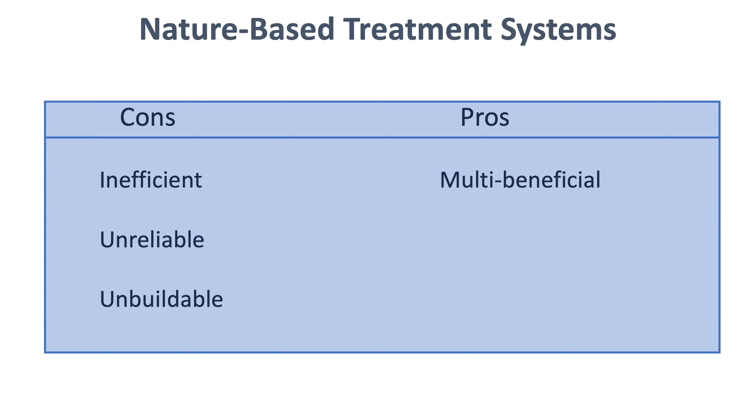So with all of those things working against nature-based treatment systems, when would we ever build them? Well, one of the things that stands behind nature-based systems and makes them particularly attractive is this idea that they provide multiple benefits. So a wastewater treatment plant might be very good at removing nutrients from wastewater and protecting San Francisco Bay, but it's not going to provide habitat, and it's not going to protect the community from sea level rise. And a nature-based system has the kinds of characteristics that tend to engender multiple benefits, whether they're aesthetic, whether they're wildlife, that we just don't see from conventional constructed infrastructure.

Also, when we think about nature-based treatment systems, they often score better in the sustainability indices that we use. So when we think about the triple bottom line of nature-based treatment systems, they do have social benefits. They tend to produce fewer greenhouse gases, and they tend to touch all the right buttons that we normally think about when we think about sustainability.

And because of the multi-beneficial nature of nature-based systems and the sustainable attributes of these systems, they're eminently supportable by members of the public. So you won't see community members or environmental groups coming out to support and help build a sewage treatment plant, but you'll get members of the community coming to help you when you want to propose or even build a nature-based treatment system. And so that's really something that stands to benefit them. So when we look at this question of shovel readiness, we have to overcome the cons and emphasize the pros.

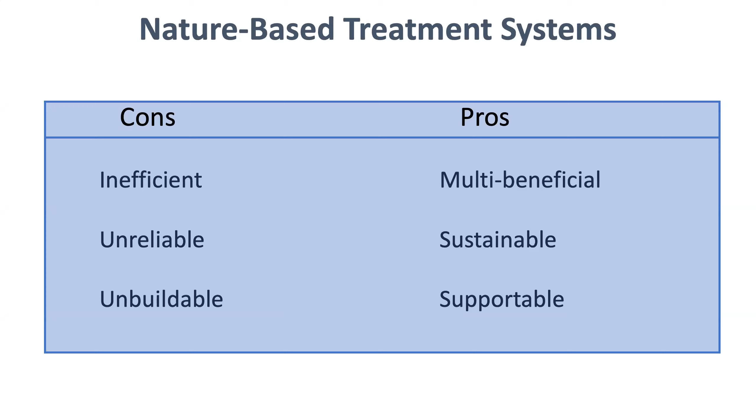And so I want to come to think about the nature-based treatment system that's turning out to have the greatest traction here in the Bay Area, especially as we look towards protecting our communities from sea level rise and creating a more resilient water supply, not relying upon imported water coming into the Bay Area and increasing our amount of recycled water. And that's the horizontal levee. Now, what is a horizontal levee?

Well, those of us who've been working on the horizontal levee, my co-authors and I have been trying to define this now for a few years. We are part of this organization that is funded by the EPA, that's administered under the San Francisco Estuary Partnership, where we have these convenings to think about nature-based treatment systems. And one of those convenings, we were asked to put in our own words what a horizontal levee is. And you can go to that YouTube link and see what we all say about it. But I'll give you my take on what a horizontal levee is, especially in the context of this talk.

So if we want to think about the coastline, most of the Bay Area is surrounded by constructed levees, and these levees are protecting our communities from storm surges and in the future, increasingly from sea level rise. And on the bay side of these constructed levees, we tend to have riprap and other types of materials that are armoring them and protecting them from storm surges. And the idea behind the horizontal levee is part of a larger vision of integrating the levees that we've built and that we're going to build in the future with a natural treatment system that can be used to improve the quality of water that's being discharged by sewage treatment plants to the bay.

And when you put this together with other types of wetland restoration projects, you end up with improvements in habitat on the edges of the bay, better protection of those constructed levees from the energy of storm surges, and an aesthetic feature that may provide recreational options for the public. And so this is something that really makes the horizontal levee quite attractive. And it's an idea that was developed by my co-author of this talk, Jeremy Lowe at the San Francisco Estuary Institute, and his colleagues at ESA and others at the time that they started the project.

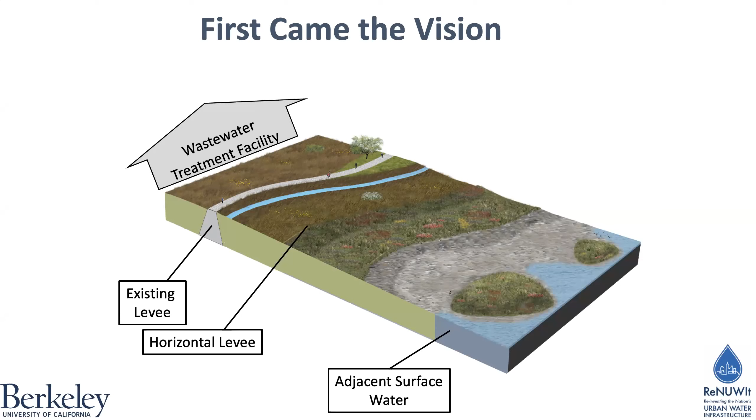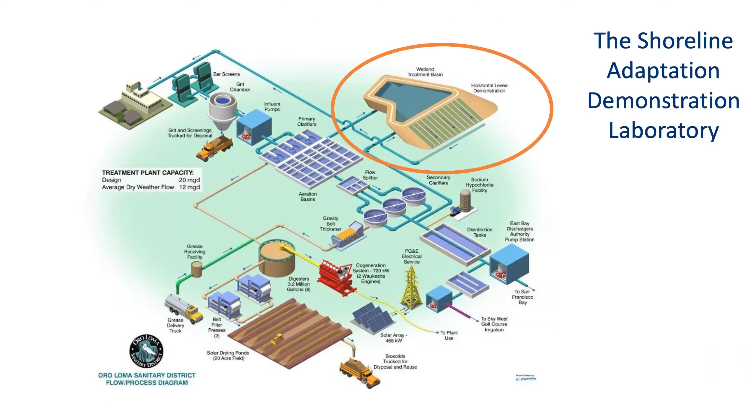Now, what is the real horizontal levee? It's part of a project at the Oro Loma Sanitary District. We call it the Shoreline Adaptation Demonstration Lab, and it's a small part of the Oro Loma Sanitary District's wastewater treatment plant. It was an opportunity to build a horizontal levee demonstration site when the plant was upgrading a wet weather treatment basin. And so with a $2.1 million grant from the IRWMP program and $3 million from the Oro Loma Sanitary District, a wet weather facility was augmented with a horizontal levee.

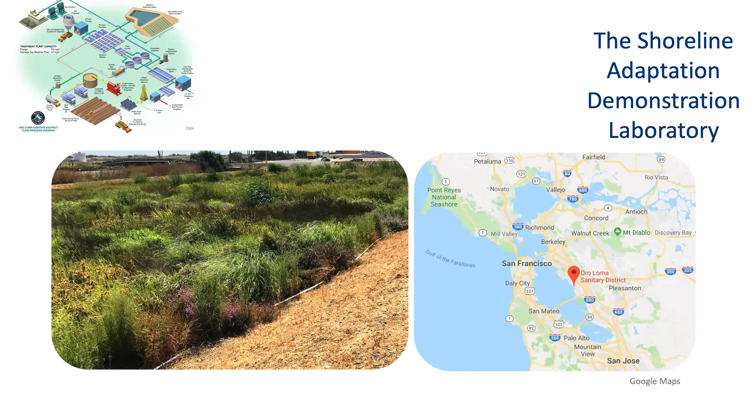And you can see here the location of the Oro Loma Sanitary District plant and a photo of the horizontal levee demonstration site. Maybe more relevant than the photo would be to look at a plan view of the facility, which is set up as a test lab to understand what different types of fill material and plantings can do with respect to improving water quality. So you can see these 12 separate lanes. They almost look like bowling alley lanes going from top to bottom.

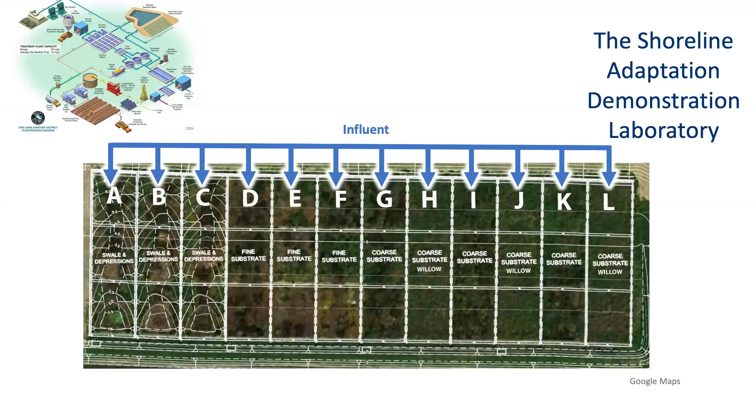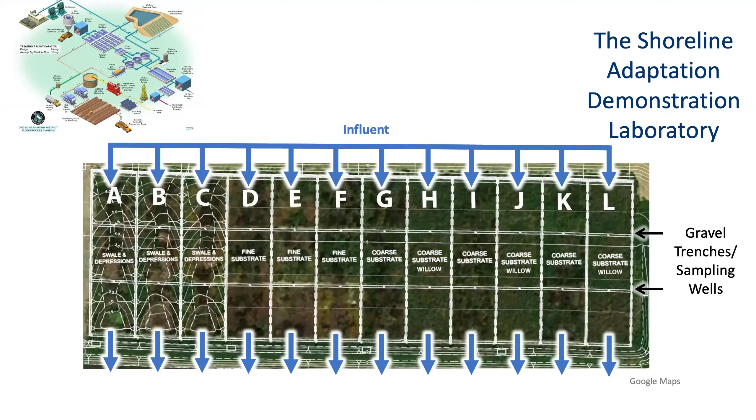We basically just had fill material, sand and clay brought in, and then the folks from Save the Bay helped culture native plants from the bay type environments that are typical of this kind of wetland. And we just put in these little twigs, maybe most of them were about this long. And after a couple of years, they had turned into a thriving wetland.

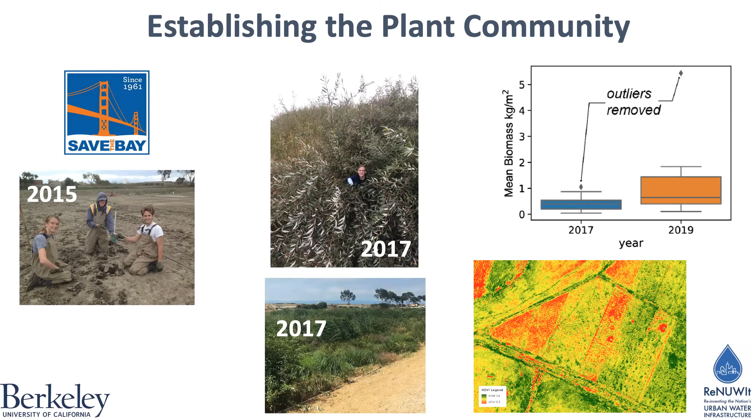And then since then, the growth rate has leveled out, and we've been able to track this using drone technology and ways of ground truthing that by seeing the growth rates. But it's pretty much reached maturity in about 4 years. And what we've done is we've been passing the wastewater effluent from the Oro Loma Sanitary District's treatment plant, so-called nitrified effluent, where the nitrogen species in the wastewater have all been turned into nitrate.

We've been passing it through a layer of gravel and coarse sand at the bottom of the wetland. So this is a cross section. It's about 1 meter thick, and the lower 2/3 of it or so is this sand and gravel layer. And in the sand and gravel layer, we put some wood chips. And those wood chips act as a home for microbes that grow in a biofilm. And the microbes are the key to this. They're degrading the nitrate, turning it into nitrogen gas, and they're degrading organic chemicals.

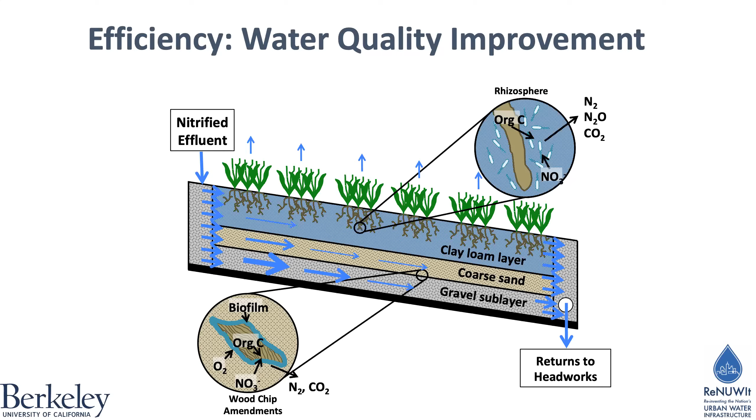And then on the surface, we have the wetland plants, and they stick their roots down and sip water out of that sand and gravel layer. And that's how we're able to keep these plants alive on the elevated surface of the horizontal levee. Well, how does the horizontal levee work? It works well if you keep the water underground.

And when we did that, we were able to remove nitrate within the first 10 meters of the slope. And surprisingly to us, just about every pharmaceutical compound that we were able to measure in the wastewater disappeared in that first 10 meters of the horizontal levee. And we were pretty excited about that until we sat down and did some calculations.

And we calculated that by the time we turned the flow of the horizontal levee down enough to get the water through the subsurface, we were only putting about 25,000 gallons a day through the wetland. And we did a back of the envelope calculation of how much land we would need to dispose of all of the wastewater effluent from the Oro Loma Sanitary District site. And we calculated something like 44 miles or 71 kilometers.

And that just seemed, given the cost of building these horizontal levees and the land available, to be something that was pretty untenable. And so we were a little bit down about that until we started having more discussions with our friends at Valley Water, who at the time were thinking about their potable water reuse project. And one of the main concerns, you'll probably hear this from Hussein a little later today with the Valley Water project, is what to do with the reverse osmosis concentrate that they produce during the water recycling process.

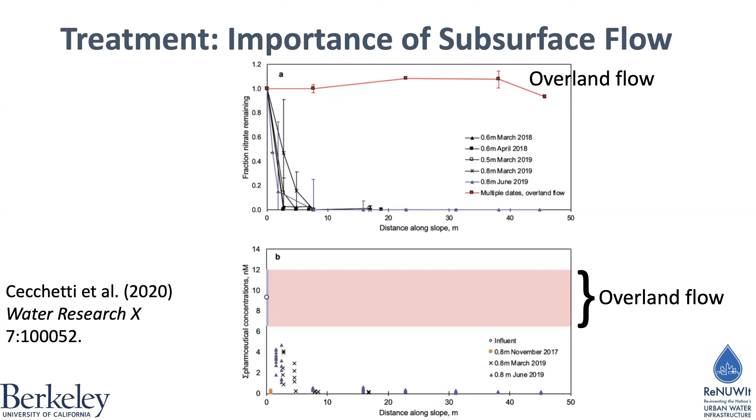So we recognized that the problem that we were facing in the potable water reuse project was an opportunity for horizontal levees, because if instead of putting wastewater effluent into the horizontal levee, you put reverse osmosis concentrate, the area that you would need to treat that water would come down by somewhere between a factor of 6 and a factor of 7, because in the RO process, we capture about 85% of the water, which creates this concentrated brine, which is about 6 or 7 times more concentrated than the wastewater.

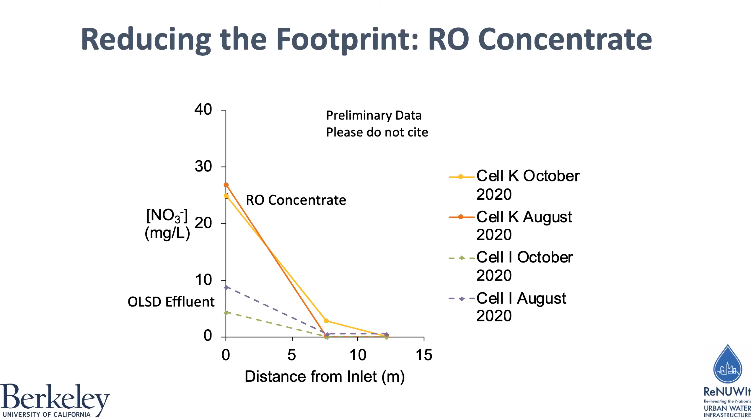We see similar kinds of things with the pharmaceuticals. I just didn't bother to put them up here. And so suddenly we were dropping the area we needed from something like 44 miles to a little over 6 miles. And that started looking more reasonable. And more recently, the team has been involved in some discussions of how we might drop that further. And I'll share with you one of the concepts of how we might reduce that area further.

Recall that this is a plan view here at the top, and then the bottom is a cross section. Recall that all of the action is happening in the first 10 meters of the horizontal levee, and the horizontal levee is about 45 meters long. So we could essentially plumb this. So we have 4 separate cells treating water and introducing water at 4 different points. So if we introduce water, as shown in the top gray, through 4 different subsurface pipes and take it out after it's been in the levee for about 10 meters, we could reduce the footprint that we need by another factor of 4.

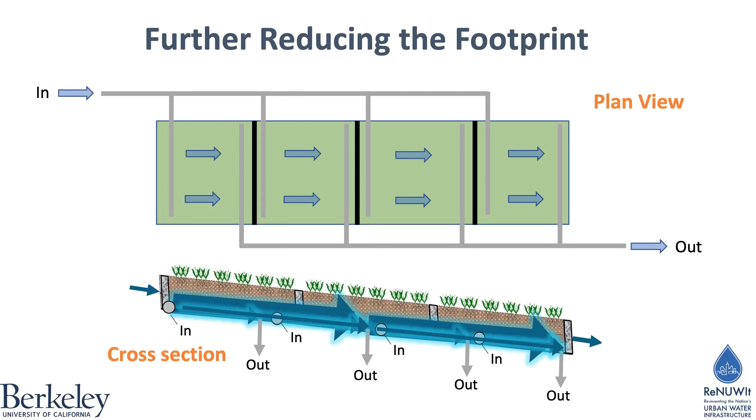And then if you're thinking, well, what does it cost to build these? Our latest estimate of the construction costs of the horizontal levees are somewhere between $10 and $20 million a mile. And so we're talking about, at the minimum, $20 to $40 million, all the way up to $60 or $120 million. But again, when we talk about big infrastructure projects, those are the magnitudes we think about.

I also mentioned early on, one of the cons about nature-based treatment systems is their resiliency or their seasonality. And I used to content myself with the idea that in the San Francisco Bay, it's not such a big deal if our treatment systems slow down in the winter, because that's when we get all the rain that flushes contaminants out of the bay. I think that way of making myself feel better about this has kind of gone out the window a little bit with the recent droughts. And so I was very happy to see in our data that the nitrate removal in the horizontal levee doesn't really slow down in the wintertime.

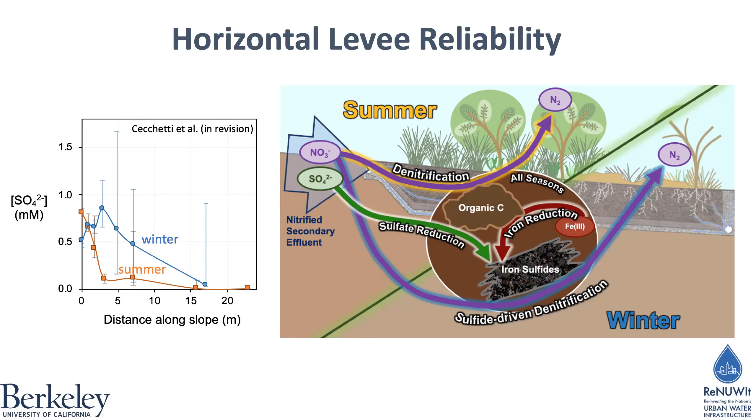So enough of the science here. I think the real question when we get to this question of gumption and shovel readiness is getting these things built. And so there really are two types of permitting challenges that we need to overcome. The first is related to water quality. And when we think about water quality, we're really talking about the NPDES permits, the permits that were established under the Clean Water Act.

And those Clean Water Act permits, think about everything coming out of the end of a pipe. And so you need to have a point of compliance, and the point of compliance is usually the end of the pipe coming out of your treatment plant. Well, what does it mean when the end of your treatment process is actually a subsurface wetland that's seeping into the bay? Where do you collect samples, and how do you give people credit?

And so some of our discussions that we've been having with various individuals associated with the regulatory process think about this question of maybe the point of compliance is still the pipe coming into the constructed wetland or the horizontal levee, but you get credit for installing the horizontal levee because it's a best management practice. And there's precedent for this in other areas of pollution control.

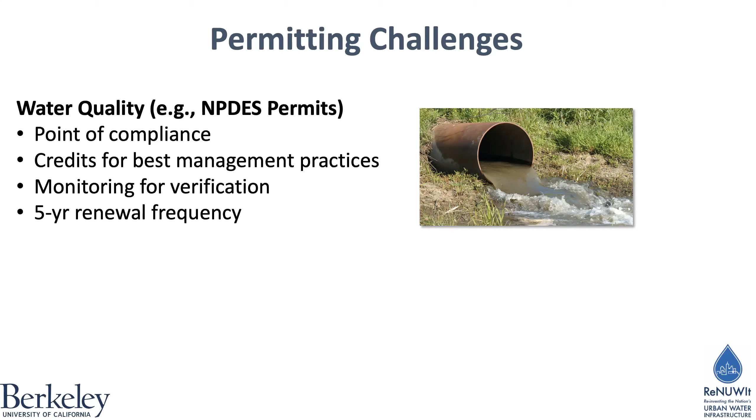And then if you monitor this thing to verify that the horizontal levee is actually performing, and it's subject to the normal renewal process of these permits every 5 years, there's a way to control things in case it doesn't work out as it's planned. So I think the water quality part is tractable ultimately.

The second piece is the idea that if you're building these horizontal levees, you're putting fill into the bay, and putting fill into the bay has been an area of considerable controversy over the years. And so there's a very complicated permitting process involving the Army Corps of Engineers, the Fish and Wildlife Service, NOAA Fisheries, California Department of Fish and Wildlife, and BCDC. They come together in an organization called the BRRIT.

And what we see is that the BRRIT has already started to think about wetland restoration projects, not projects involving treatment, but restoration projects. And they have some ideas, and I think they serve as a useful starting point for further discussions. But it's still maybe the Achilles heel of this process.

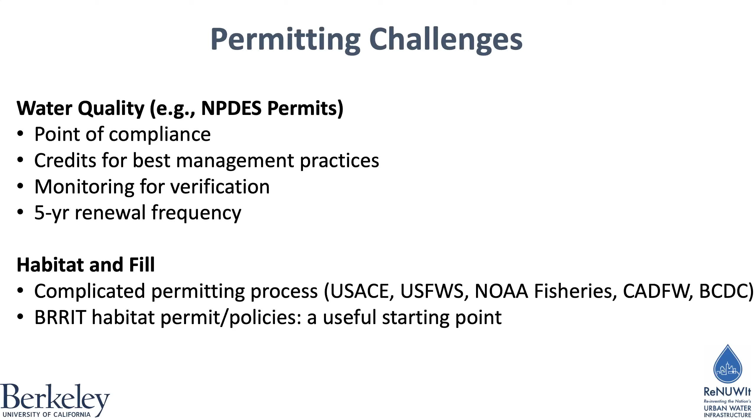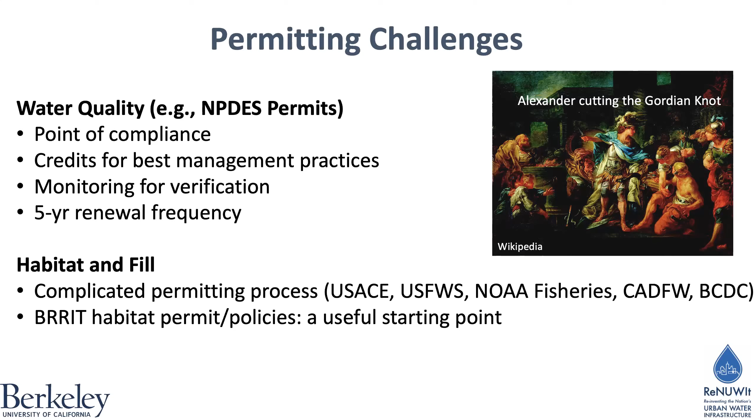And thinking in terms of Achilles heel and old legends, I like to come back to the legend of Alexander cutting the Gordian knot, because really sometimes it takes a talented leader to understand that the solution to a problem is often the simple one that involves making things happen and making sure that things get done rather than talking about the best way to unwind a complicated mess.

I talked also about multi-benefit solutions, and we often talk qualitatively about multi-benefit solutions because they're hard to wrap your arms around. But a few years ago, one of my doctoral students, Sasha Harris-Lovett, studied this idea of the multi-benefit aspects of nature-based treatment systems relative to other types of alternatives by interviewing a variety of utility managers and regulators and non-governmental organization representatives around the Bay Area to try to understand their preferences.

And the reason it came out as the preferred alternative wasn't necessarily what people thought of in terms of its price, but it really seemed to be a combination of the multiple benefits of it, the sense that you could not only solve a water pollution problem, but you could simultaneously provide aesthetic benefits and possibly habitat, as well as protecting the levees from sea level rise and storm surges. And so, we think that there's good evidence that it's something that is well supported in the water community around the Bay Area.